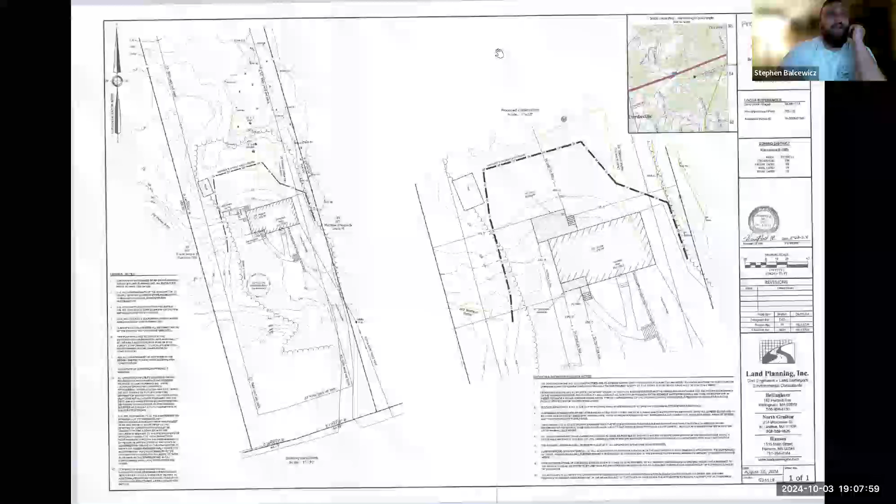The resource area on site is located here, and the associated buffer zones are indicated: 20 foot no-work zone and the 100-foot wetland buffer as located here. We are proposing to put sediment barrier and silt fence around the perimeter of the construction area. We are seeking a negative determination to complete this work. I'll stop sharing my screen and I'd be happy to answer any questions.

Just a quick one on the erosion control barrier, your microphone was a little crackly. I heard silt fence and the other element is straw wattles, is that right? Yes, we're going to propose the straw wattles with the silt fence on the low side of the wattles, I should say.

Questions, comments from the commissioners? I have just some comments, Ben, if that's okay. Oh, please, yes, thank you. So I took a look at this and I had the recommendation of pulling in that erosion control line quite a bit, and possibly even using just a straw wattle or compost sock. I checked with the builder, they're only using a small excavator just for the sonotubes, and that would be it disturbed back there—nothing else is going to be dug or graded. So if the commission's okay with a lesser option, I think the silt fence might ironically have a little bit more disturbance than something like a straw wattle or a sock. But other than that, I had no other comments.

Thank you, Melissa. Did they mention if they're going to be using an auger or excavating with the bucket for the footing? I think just an auger. Okay, even better.

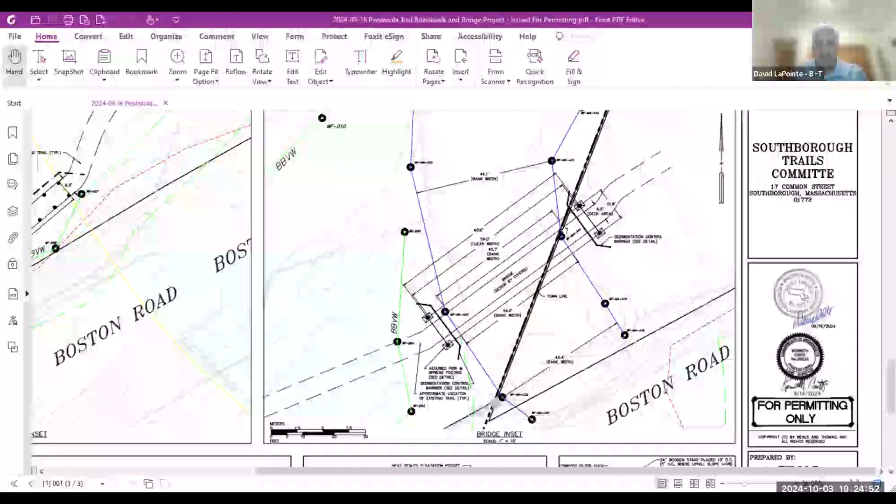We are proposing to install some erosion control and sedimentation control measures during construction, consisting of silt socks and silt fence, as well as a turbidity curtain or turbidity barrier in the water area adjacent to the boardwalk site.

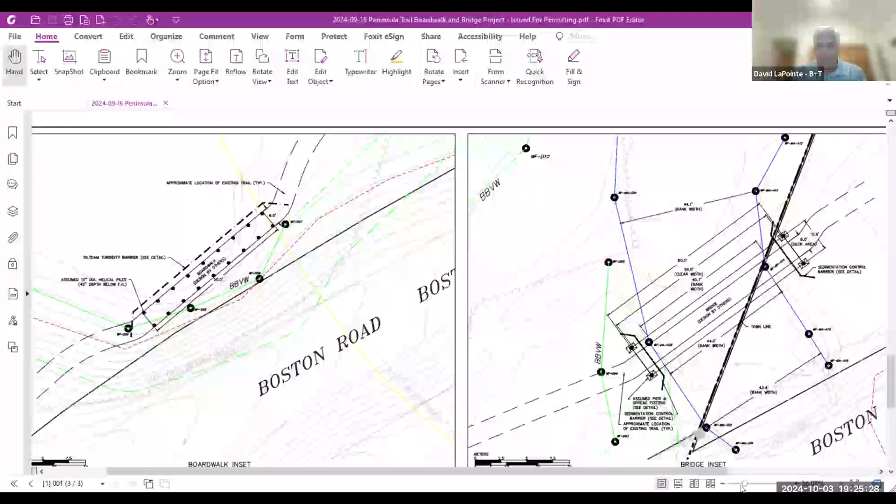Some of the work will result in some impacts to these wetland areas, but as a result, we are proposing to replicate some of that disturbance.

If I go back to my screen here, this is a bit more of a blow up, where again the boardwalk is to the lower left, the bridge is to the right. The replication area we're proposing is only slightly less than 50 square feet, but we're proposing that in this area up to the top of the page.

The reason why we're putting it over there is this area that's kind of the lighter brown area through the center of this image is a gas line easement, so we just wanted to avoid getting anywhere near any subsurface gas lines. Granted, it's a small area and it'd just be hand tools to create the replication area, but again, just trying to stay away from it as best we could.

So at this point, we're requesting an order of conditions for this work, but obviously open to any questions or anything that you may have. Thank you very much.

Okay, so we've not sent this, Melissa, I seem to recall talking about this over email, but we did not request a review from Lucas. Do you have any updates or additional information for us, Melissa?

So there isn't a DEP number quite yet, but I was wondering if you could talk a little bit more through, it is a small area for replication, but how you will be conducting that, if there's going to be plantings or how to complete that work.

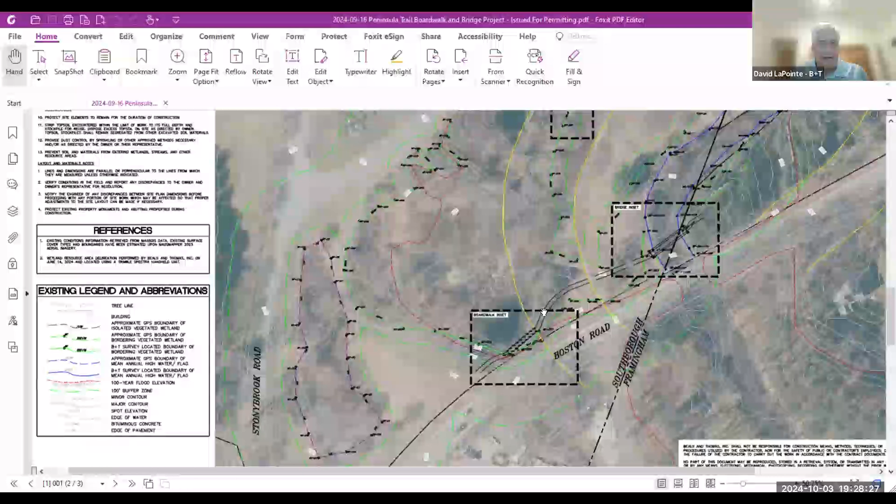loam material or anything like that? I do not believe that we have a detail of the replication area, no. Okay, well, other than this slightly blown up area, okay, but not really a detail, no.

Okay, and the replication ratio, do you know off the top of your head? Is it 1-to-1? I do not know off the top of my head. Andrew, who I believe is on the call, may be able to provide that answer. I can find that number in a few moments.

But while I'm speaking to that earlier comment, we're really seeing the replication area as a bucket and shovel exercise. It's a very, very small area, and we're going to reseed it with the New England wetland seed mix or whatever the commission finds approvable.

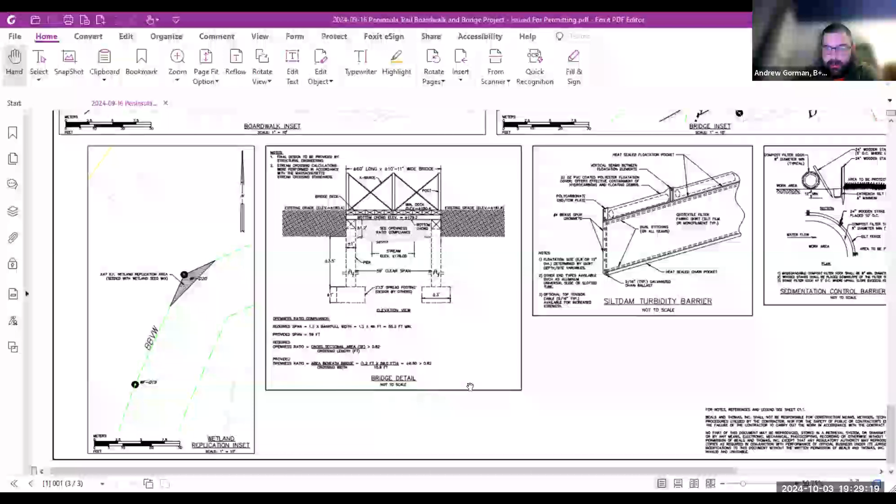I'm just pulling up the form. So we have our temporary impacts reported in the NOI WPA form. For some reason I don't have that at my fingertips, but the impacts primarily come from the helical piles. They're going to be driven into the histosol soils. And I'll find this number and then I will unmute and provide it for you.

Okay, thank you. Now, the only reason I asked the question about how the planting specifically will take place is it can be tricky to get success with a wetland replication area. One thing I've learned through the years is that having an adequate depth of growing media at the correct elevation is critical to having a successful outcome. So I was just curious if there was...

It's only 10 square feet of permanent BVW impact. Oh, okay, yep, thank you, Melissa. And that is reported on page 3 of the WPA form.

So we certainly have almost a 5-to-1 restoration here, or replication, and we're definitely cognizant of what it takes to get it to work. We're going with the wet mix, particularly for it being a small area, and the wetland to the south of this is a wet meadow, so we're trying to foster that type of growth. Okay.

Have we received a waiver request for the 20-foot no touch? Yes. I would propose as mitigation for that: first, the wetland replication, and also that the project is to provide safe public access to an extensive public open space area. We've used that as our primary mitigation for a Boy Scout project on the other side of town, thinking back on it. With those 2 things, that would seem adequate mitigation for the 20-foot no touch waiver.

That's all I have. Questions, comments, concerns from the commissioners?

I also confirm, having gone out with Kat, you do take your life in your hands a little bit walking around Route 30 — people fly by, jumping guardrails through there. Yeah, I did have one question.

The temporary impacts — could you explain what they are and why they're temporary? The path maintenance, I think. Exactly. It's really just a result of the access to get in there with equipment — small equipment, probably a mini excavator, will be utilized, just bringing materials in to do the construction. The pathway is basically a worn path, and presumably even bringing in small equipment like that with the workers probably will not cause significant impacts at all.

Okay, so it's a pathway for the equipment, not for the trail itself. So it's not a permanent thing — it would eventually grow back.

Yeah, okay, thanks. I had a quick question too — just wondering how long it would take to construct this work, and is this something you're trying to get done before winter, or is there a desired time frame, a desired season that's better to do this kind of work in an area that's so wet?

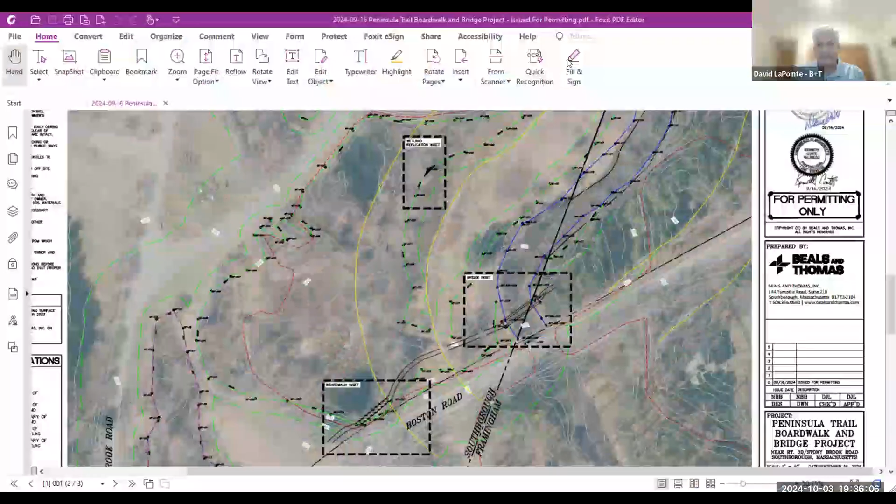So we would be coming in to get to the eastern side. This isn't the greatest image, but hopefully you can envision there's the wetland area over here where we're doing the boardwalk crossing, and the bridge across the stream here. We were planning on coming in from the Pleasant Street or Framingham side to access the eastern side of the bridge, coming from the MWRA parking lot through the meadow area along that easement to access the western side of the bridge and the eastern side of the boardwalk. Then from the driveway of the MWRA property to get to the western side of the boardwalk and western side of that wetland area.

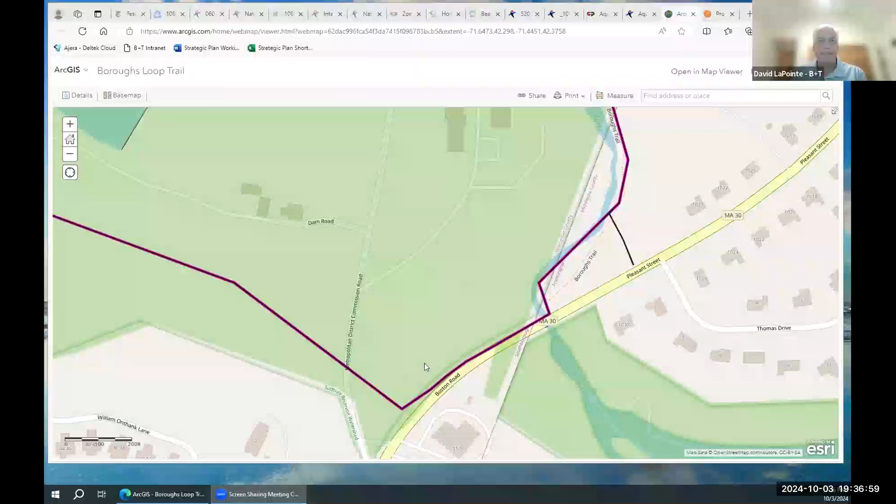It doesn't sound like you're going to be stockpiling any fill materials, and you'll only be generating a small amount of spoils from the footings and so forth. So the only stockpiling that'll really take place is more of the bridge components and lumber for the boardwalk. Is that okay? Exactly, that's exactly right. Yep, okay.

Any questions, comments, or concerns from anyone who has joined us from the public here this evening? If so, please use the raise hand function and we'll promote you up. It does not look like there is.

So unless there's anything else from the commission, I think we are ready to close the public hearing for the... excuse me, no, oh, I'm sorry, we don't have a DEP number. Yes, my apologies.

Just to clarify, we have some special conditions now, a special condition for the replication area. And that's about it.

We can wrap the vote in for the waiver when we are closing the hearing next time and voting on conditions. I'll have that drafted for the next meeting. So unfortunately, the only thing that's hanging us up is the DEP number, which should be coming fairly shortly. I think we're looking at continuing until our next meeting in three weeks, when I'm sure we'll have the number in hand and can get that all taken care of.

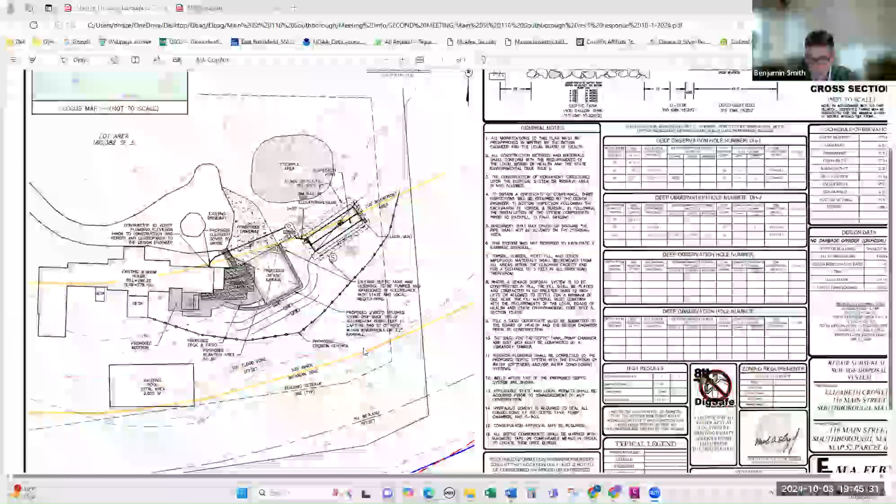Okay, Mr. Hazen, well this is just in terms of mitigation. I don't know if there are any - a lot of the lots along the aqueduct here have a lot of invasives close to the water. There's a potential avenue for some kind of mitigation. I'm not sure if you know the answer to that, whether they're present or not, but it's pretty common for this area. Just thought I'd throw that out there.

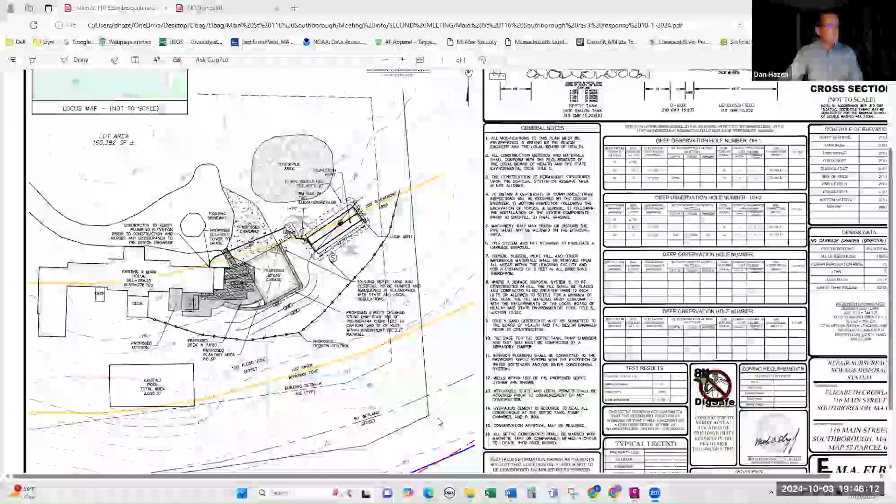So thank you very much, Joe. Mr. Hazen, it sounds like that's the open question right now, is the riverfront area mitigation. I have not been out there. I know Mark Elbag has - this property is basically lawn right down to the edge of the aqueduct. Part of it's mowed by the MWRA, the other part, the rest of it's mowed by the homeowners.

I don't know if there's any invasive species on site. It's something we can look at. We are proposing a 2-foot wide by 2-foot deep stone drip edge on 2 sides of the garage, and also extending along the lower portion of the patio proposed. These are stairs in this area, so we couldn't really put anything in that area.

And a small proposed planting area in this area to collect any sort of runoff. We're assuming that the patio's gonna be impervious. If it's gonna be in nature with the other ones, they're real close laid brick, so we wouldn't be able to get any sort of infiltration through that.

So that is what we are proposing as far as mitigation, other than upgrading the septic system to something that's compliant with Title V, as opposed to the one that's there now, which is not.

Okay, and the existing septic system is a cesspool, not a cesspit. It's just pumped, and that's - as far as I know, yeah, it's just, I mean, the soils out there are pretty sandy, so it's been able to survive for quite a while. But yeah, it's just some sort of a pit or stone lined, you know.

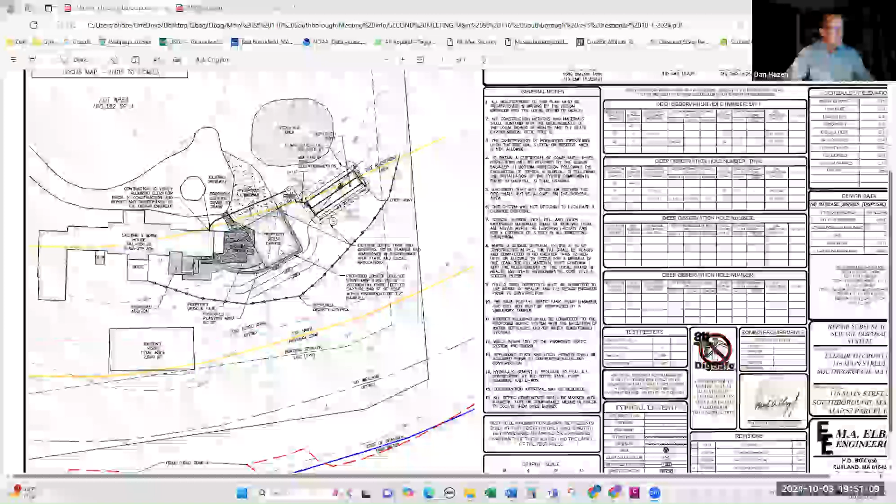So we'd pick up essentially the entire garage within this, just by flow, whether going around or coming off onto the patio and into the drip edge. It looks like a fair amount of the patio itself will also be intercepted by it to the west of the garage. Yes, this should pitch downhill towards the back.

So the current mitigation scenario we're looking at is the infiltration of stormwater, and the upgrading of the septic system, especially with its adjacency to a public drinking water supply aqueduct, also provides some mitigation. So the question is, do the commissioners feel that's adequate? Are they comfortable with it? Is there something else they'd like to see?

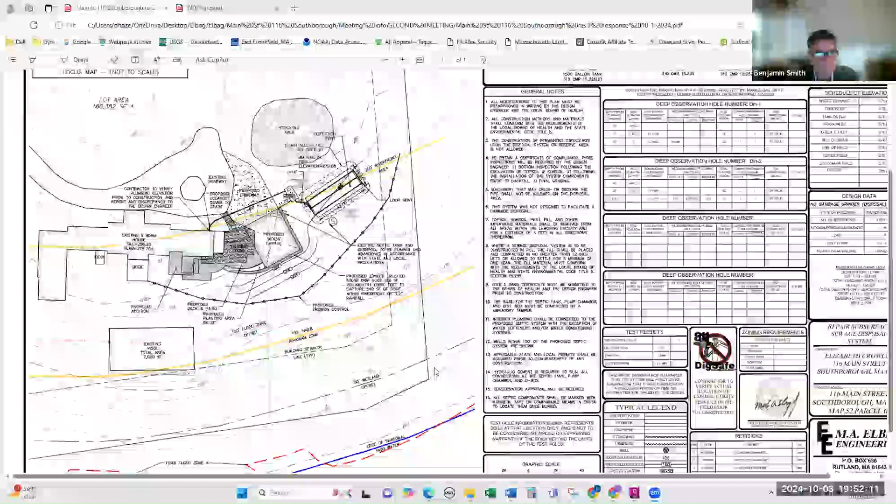Getting rid of that cesspool definitely seems like a big win, right? Oh, yeah, I think it does.

I would also recommend there is a small 60-square-foot proposed planting area. You can condition that to be a native seed mix or plantings, to be determined, instead of just a maintained landscape bed. And it is within the 200-foot riverfront zone too. Mr. Hazen, is that something you'd be comfortable with as a condition? Yes. Okay, thank you, and Melissa can point you towards the UMass list of native plants for the area.

Just a reminder, DCR also requested, and at the last meeting we said the homeowner was okay with removing the dock by hand, that's on the aqueduct that's deteriorating, just to add to it. Great, a little extra mitigation. I don't know that we can put that in our conditions because it's off the property, but I guess we can add it as requested. I think their only condition was just to let them know after it's done, so I can give you a contact for that.

So it sounds like there's a general comfort level with the mitigation being proposed. We still have not gone through their full review of the response. It sounds like we're absolutely on the right track here, and I suspect our next hearing will not be a lengthy one, but we still do have to complete our process here.

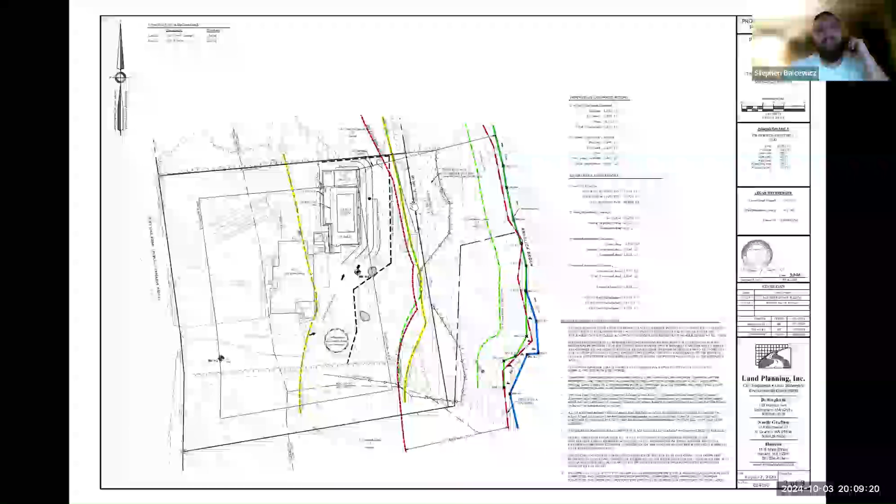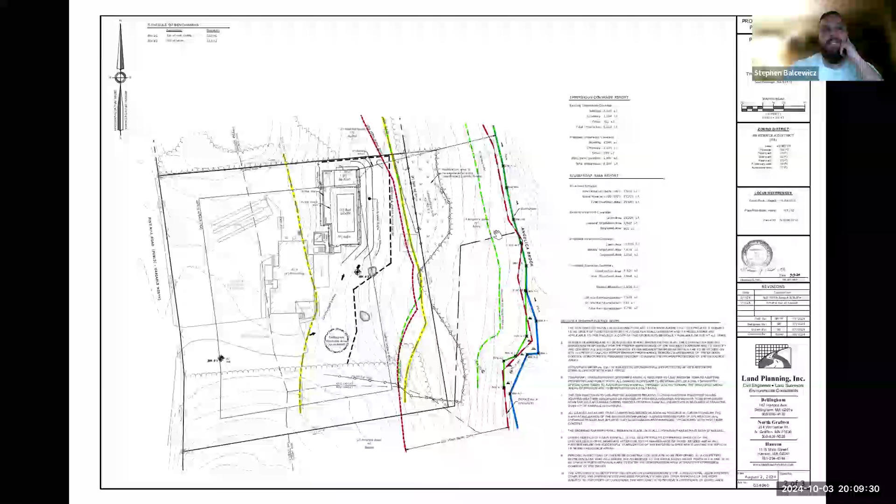So we have not provided anything regarding this. As far as renaturalization, we would like to continue to use it as it was historically used prior to this property owner.

Thank you. Questions, comments, concerns from the commissioners?

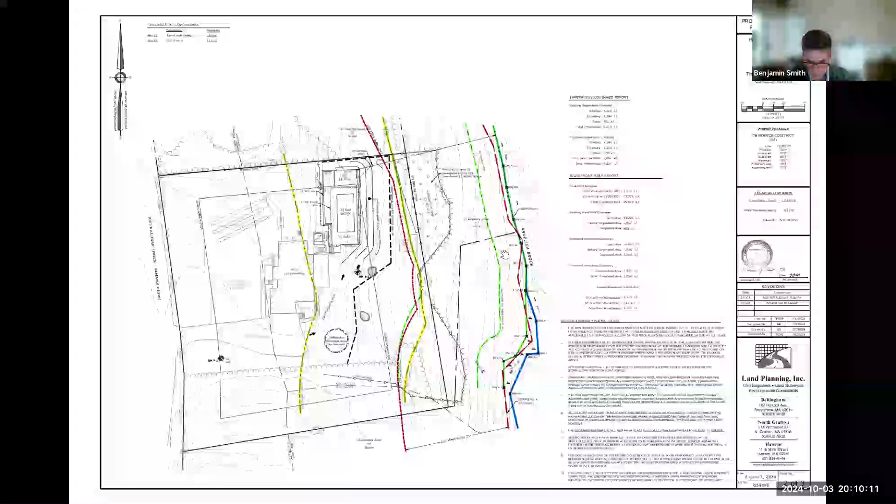So Melissa, I think we've covered our special conditions. Yeah, the only other one I would recommend adding is that if invasive removal is to commence, the commission should be notified and written permission submitted, because it would be on an adjacent property. Thank you very much. Acceptable, Mr. Belzovich? Yes, yes.

If there are no more questions or concerns from the commission, I think we're now at a point where we would close the hearing, if somebody would like to make that motion.

So moved. Thank you, and a second? I'm in, second. Oh, you got me. Zulik, yes. Barrington, yes. Upton, yes. Beth, yes.

We've just gone through all of the special conditions, so we'd be in a position right now to vote to issue an order of conditions, conditioned as discussed. If somebody would like to make that motion. So moved. Thank you, and a second. Second. Thank you. Zulik, yes. Barrington, yes. Upton, yes. Beth, yes.